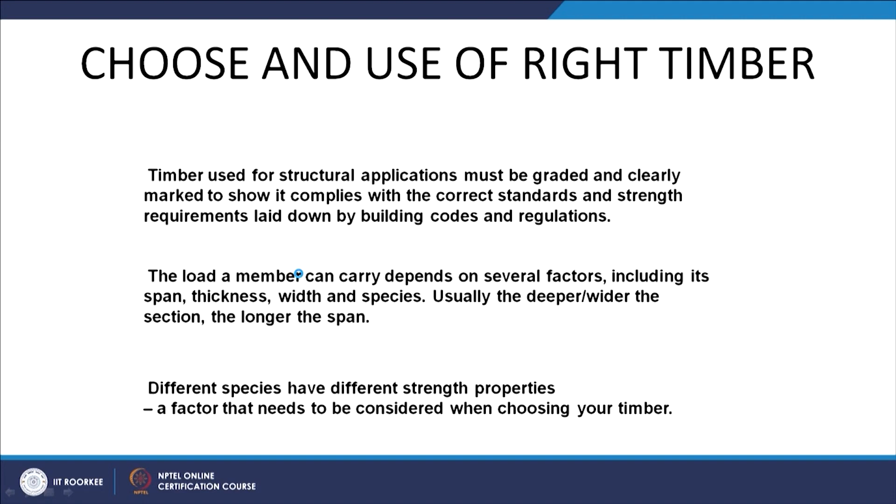The load a member can carry depends on several factors: the span of the floor, thickness, width, and the type of species. If it's oak or any other local species, the strength varies. Usually the deeper or wider the section, the longer the span. So different species have different strength properties, and one has to be very careful in choosing the timber.

For example, here's how timber is graded. You can see C16 here, which is C16 grade - this is called visual strength grading. Normally there's a trademark, a certification body, and it's a British standard reference, which is dry graded, then the company logo, and it has a strength class and species. It basically defines the strength, the size, the type, and the number of strength-reducing characteristics allowed in each grade.

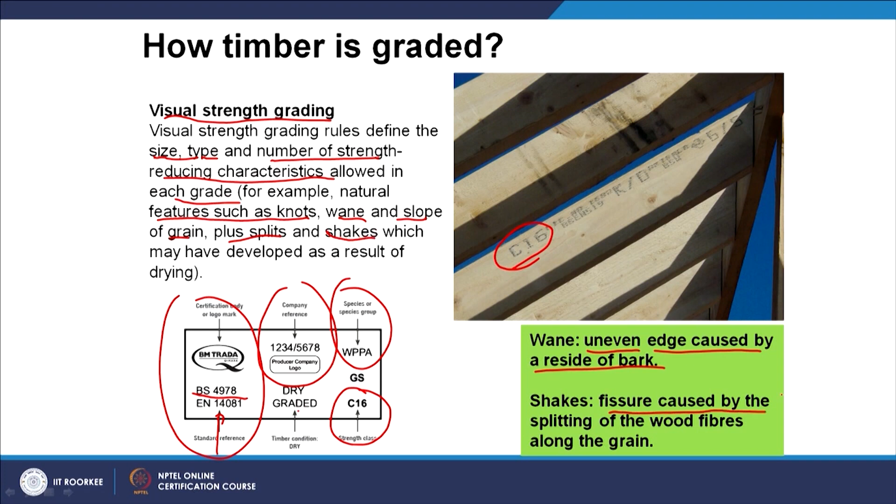For example, natural features such as knots, or wane - wane is nothing but an uneven edge caused by the residue of a bark. Then there's the slope of the grain, plus splits if there are any cracks, and shakes - shakes is a kind of fissure caused by the splitting of wood fibers along the grain. So this is grading by looking at a piece.

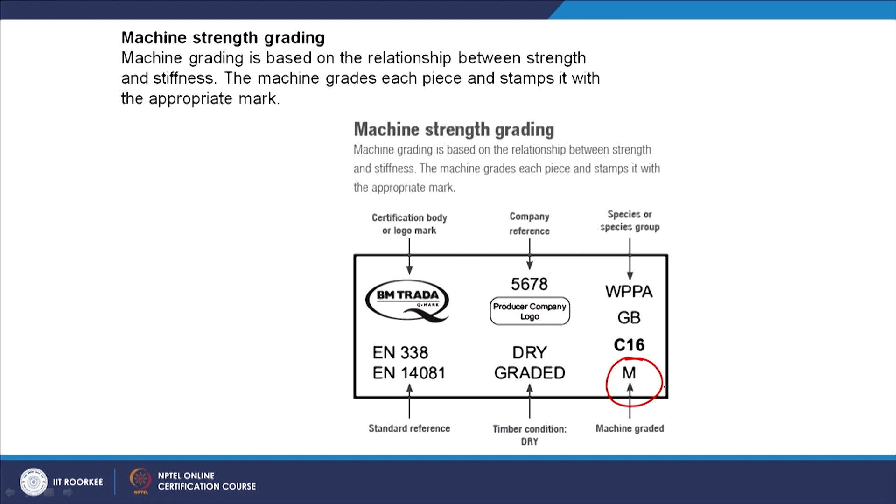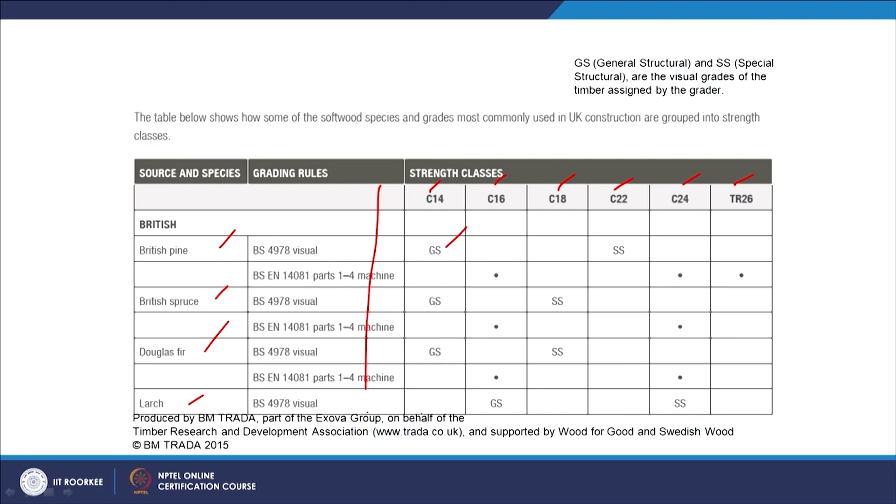The second one is machine strength grading - here you can see the M, which reflects the machine grade. I'll show you a brief classification: you have British pine, spruce, Douglas fir, and larch, each with their grading rules, and general structural classes C14, C16, C18, C22, C24, TR26. So there are certain strength classes, and also special structural ones. That is how it's classified.

So what we do is look at the following species and sizes: 38 by 97, 47 by 97, 47 by 220. For instance, if you are using 38 by 97, in C16 clear maximum span you can go for 1.76 meters, whereas in C24 you can go for 2.05 meters. So by changing the grade you can go for a bigger span.

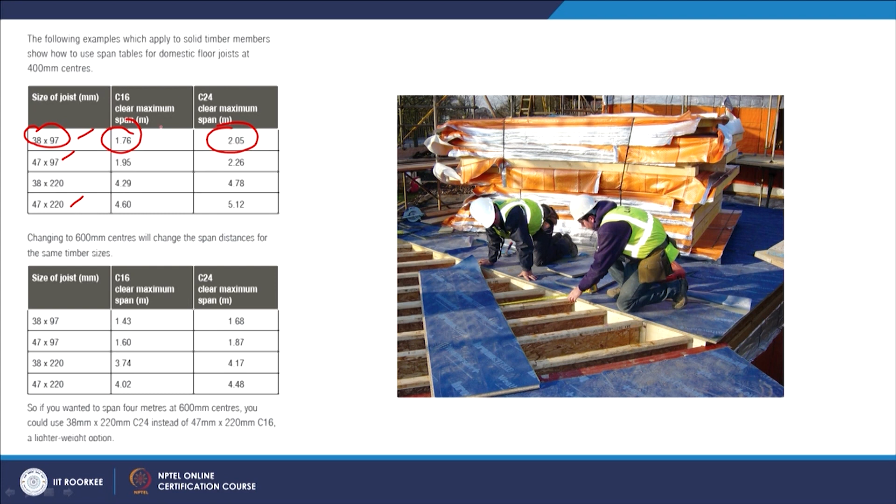So if you wanted to span 4 meters at 600 mm centers for a floor joist, you could use 38 by 220 C24 instead of 47 by 220. This means the depth of the timber changes if you are changing the grade of the timber.

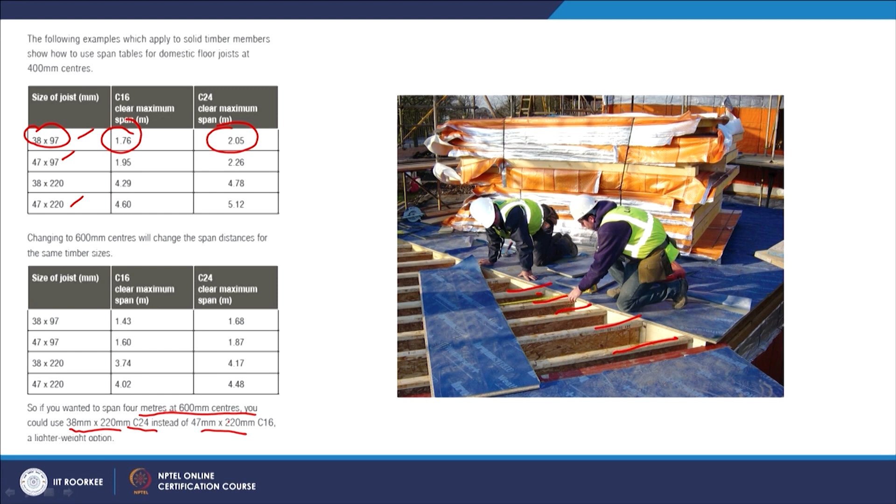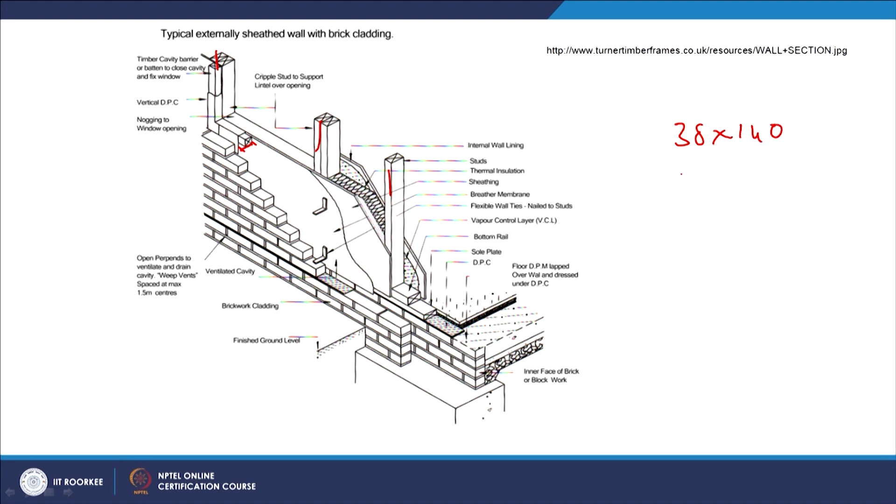This is how a typical wall section looks in most of the UK in recent times. You see the timber studs, the windowsill, and a 50 mm cavity. The timber panels are normally external. We usually follow about 38 by 140, that's the common width, whereas internal panels are 38 by 89. In the 140 panel you have 9mm OSB, Oriented Strand Board, and over that a Tyvek membrane, which is breathable, then about 50 mm cavity, and then the brick wall continues.

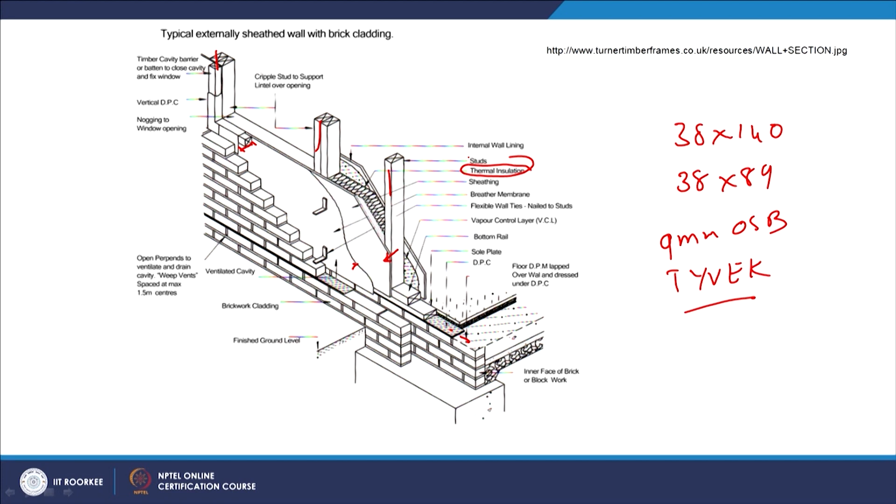And you have the DPC here, and in between these panels you have the insulation material as well, thermal insulation. This protects from the weather conditions, and this is the general makeup of the wall. I'll show you a small project how it's done somewhere in Oxford.

Generally when the architects give you the plan, you study the plan, sections and elevations. The first thing we do normally is draw all the sections and elevations.

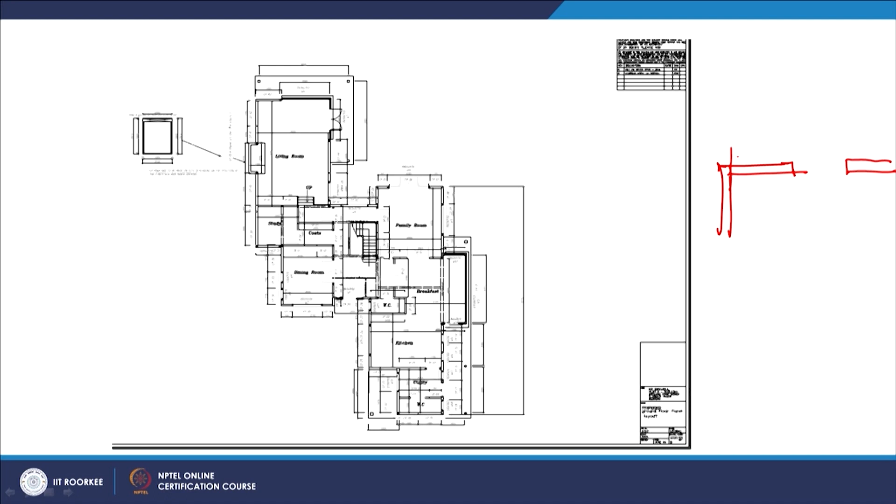Then what we do is break it down - let's say this is a wall and this is a window. We take from one edge and mark it into EP1, EP2, EP3. That works because we need to give a little buffer space for placing the lintel load, with 2 studs or 3 studs.

At the same time, for the corner stud, one panel sits here and another panel sits here, with another corner stud so that we can nail it. This is how the panels are done in a clockwise process - 1, 2, 3, 4, 5, 6.

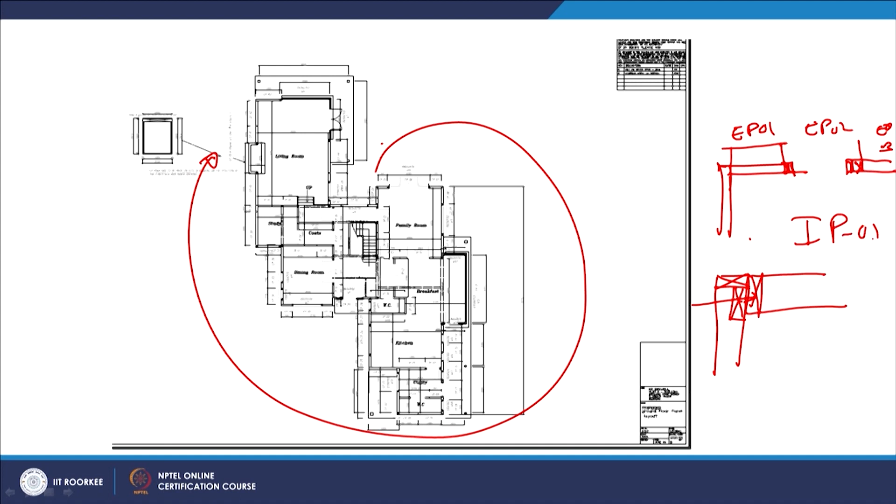At the same time, the internal panels are normally represented by IP01, IP02, and so on. Similarly, we do the first floor.

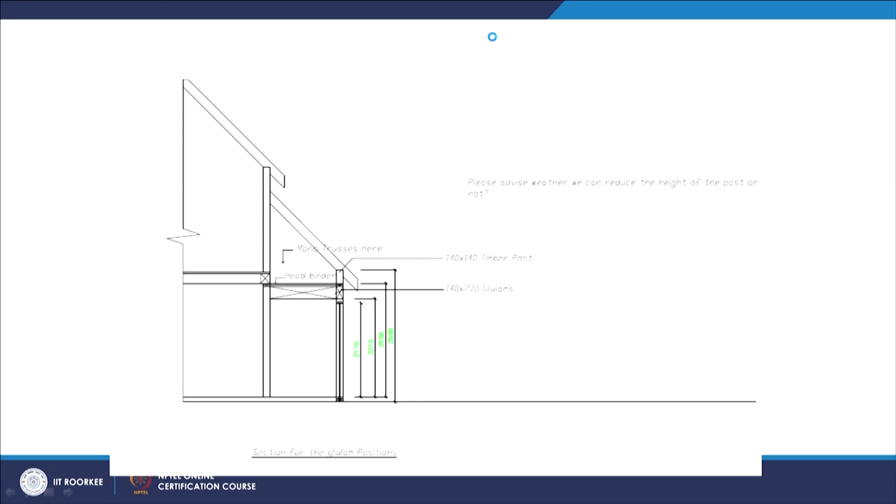When we draw the sections, the structural engineer has already mentioned where to keep the beams. So when we know these are the places we need to give beams or steel sections, one has to really carefully draft with the spacing aspect of the joist, as well as account for any other structural considerations to support those elements.

For example, here he mentioned about 140 by 270 glulams. So we need to create a beam on the other side and provide for it. This particular roof is basically a cut roof.

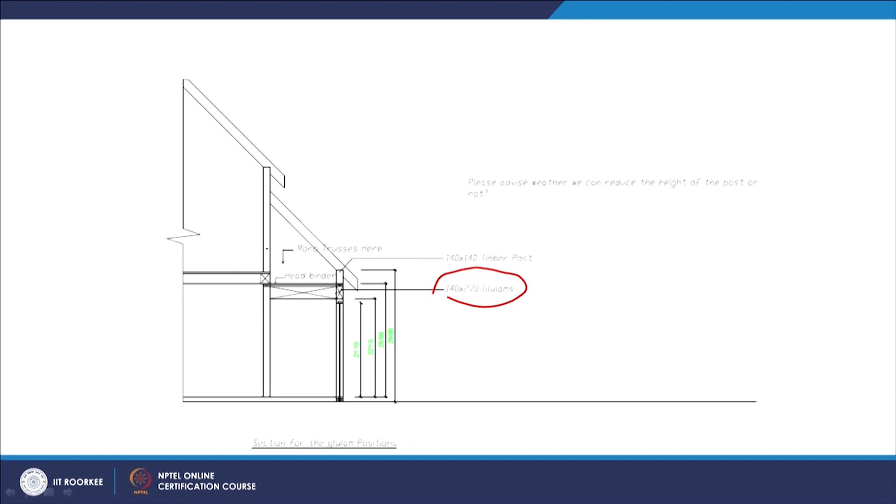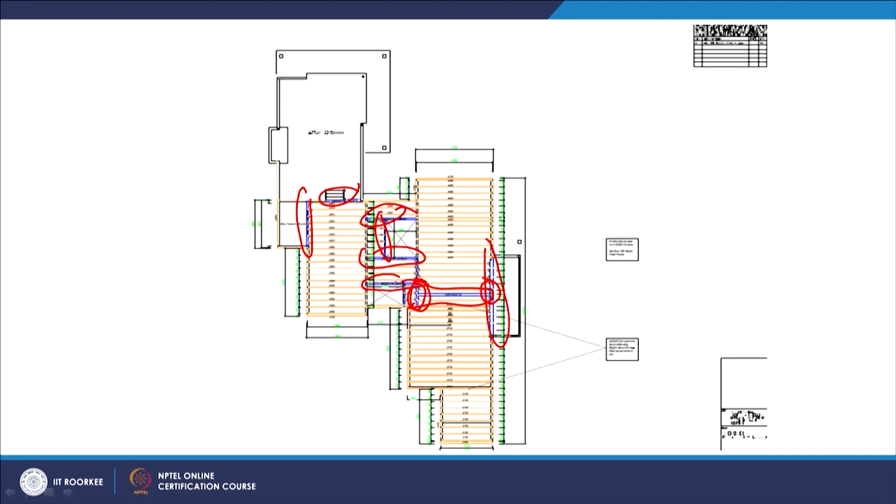So the moment you are keeping this, at these places you have to give structural provision with some more studs under it. This is another project in Rutland, a restoration project, with beam and block foundations.

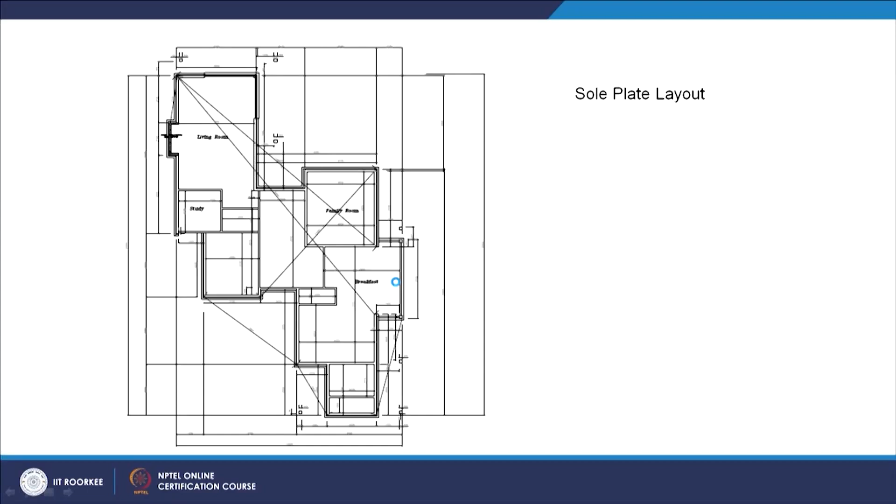After doing the layout of the manufacturing process, it goes to the erection team, where we get the sole plate layout. We measure diagonally to make sure the sole plate layout is correct.

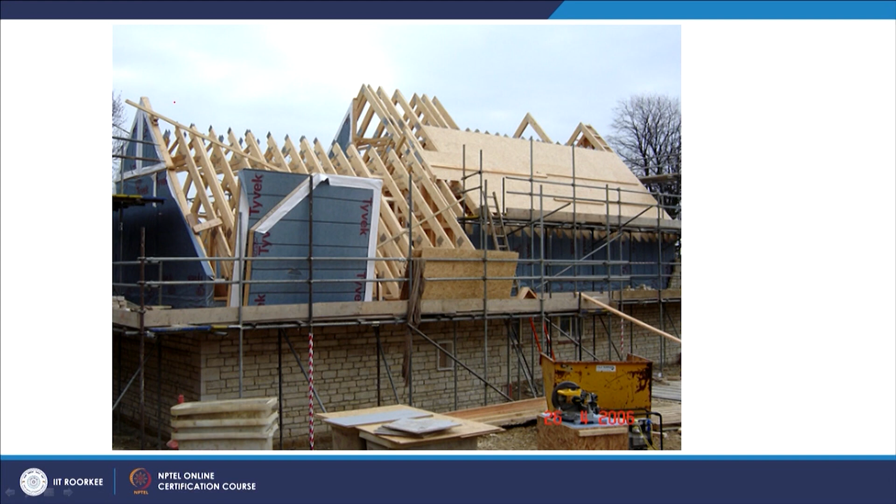Then the panels are erected. You can see this is stone because it's a restoration project, so the context of the stone facade is needed. Instead of brick we used stone, and you can see the attic truss - the whole truss is manufactured and sent to the site, and they are erected. This is how the panels look like.

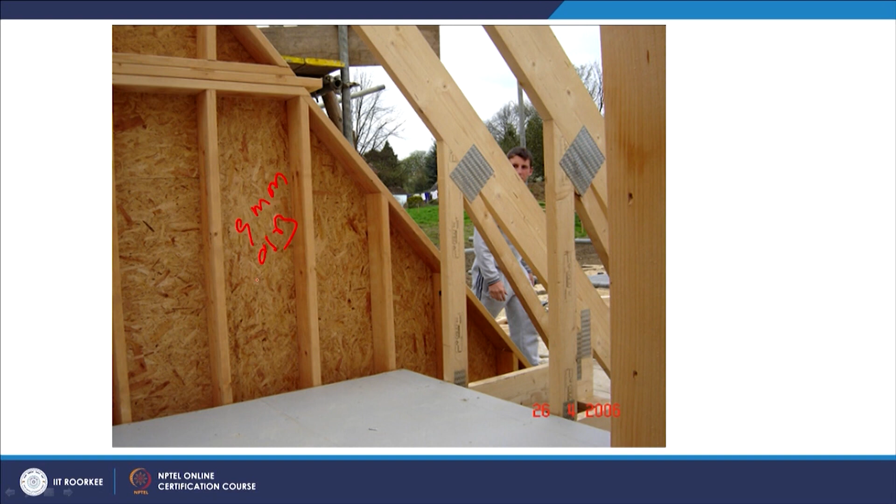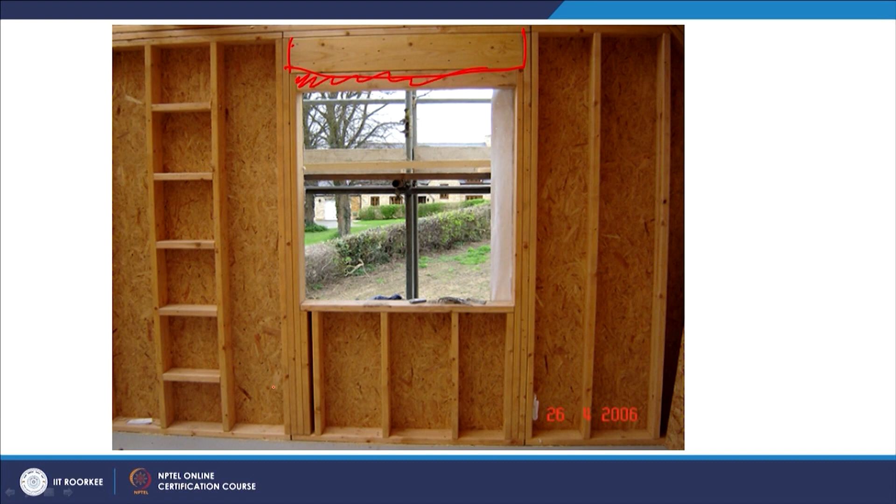And the 9mm OSB, oriented strand board, and you have the nail plates, and this is the panel, this is the head binder, and then again on the top of the panel. So this is how a window is made, and this is the lintels which are resting here, and any packer material we fill it in. Whenever there is a load coming up, the engineer suggests having these as per the span tables.

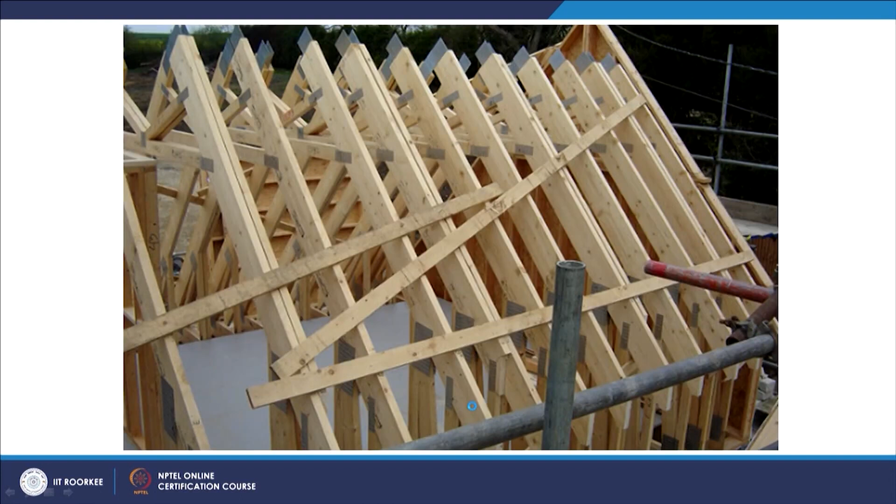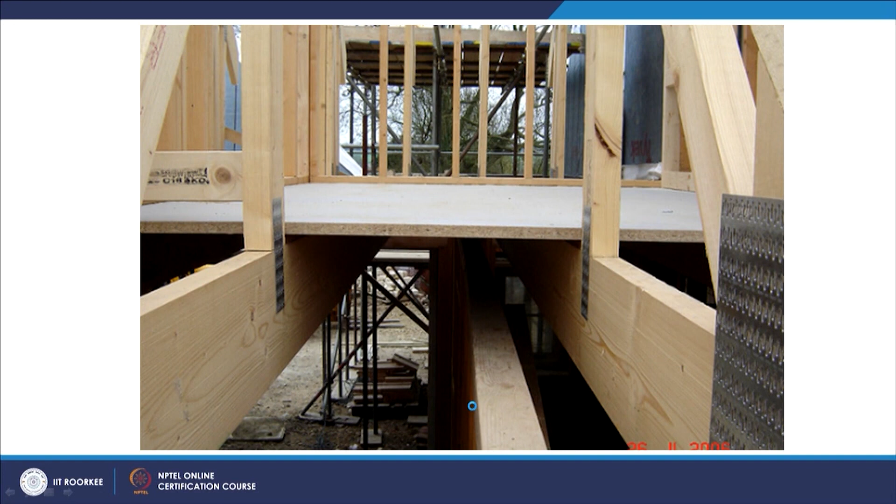And then they also show how they erect the roof, following the safety aspects as well, going step by step and putting some kind of temporary supports. This is called bird's mouth, and this is how a wooden deck, 22mm wooden deck, is placed. So this is a brief introduction to how timber frame construction is made. It's a prefab kind of thing, everything manufactured in the factory and sent to the site.

They are erected in 1, 2, 3 weeks time, and that's it, the end of the project. Then the brickwork comes on. So it's a very quick process, but the only thing is we have to take care of each and every minute detail. Even a 2mm mistake causes bigger cost and time on the site.

Now the challenge is, can design become a challenge for ensuring sustainability? Can we reduce waste by design? As I said, the moment we make any mistake in our drawing, it becomes more waste on the site, more cost, and more travel time. So obviously this is one important aspect.

So can we plan with time and money? And can we deliver aptly on time, especially in cold countries because of the weather conditions? How can this particular system be worked out in such a way that the whole project management is carried out so that we can deliver on time?

So this was my learning, and as I said, by doing these projects I realized why these kinds of advanced technologies are not taken to the Indian context, to Uttarakhand. That is where I still haven't found an answer so far, but I would still give you my journey on how right now we are working in Uttarakhand, especially in the hilly areas, along with one of my PhD students who is also working on disaster affected areas, especially looking at indigenous knowledge.

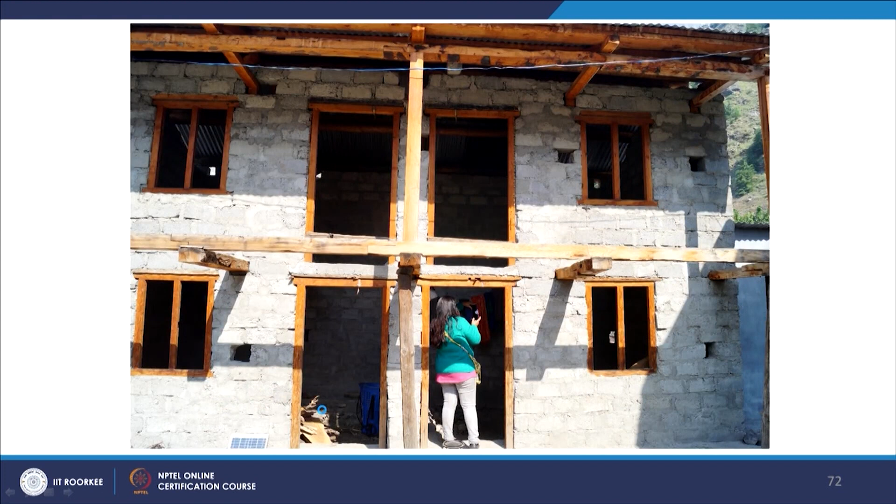So you can see how the modern developments are happening in a similar way.

This is one classic example. You can find many of these houses here and there, gradually getting abandoned because some families have migrated down, and who owns them and what to do with them, no one knows.

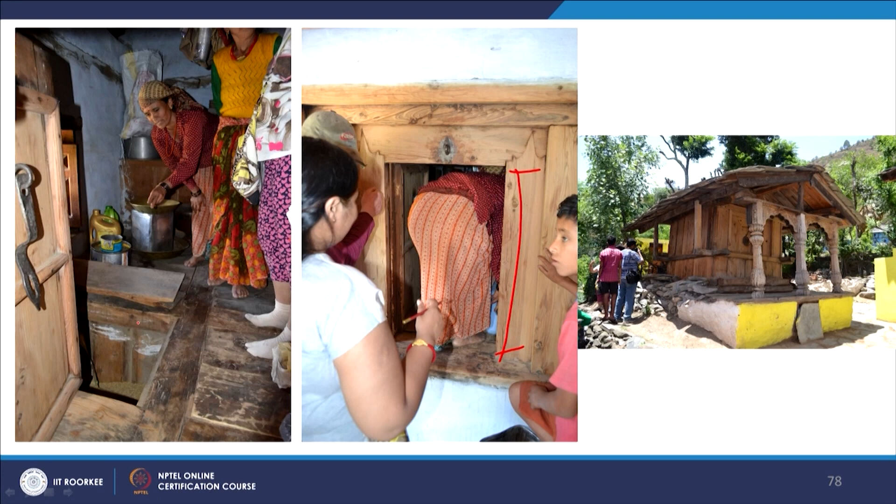Now, after the earthquake and the floods, there are a lot of recent modifications happening in this region. Especially new buildings are coming and old buildings are abandoned. So on one side they are abandoning these old buildings, but during winter I have seen people using the same buildings because it makes them warm.

Similarly here, sometimes the old people are still using these places, while the younger generation started using the new ones because of certain modernity and modern impressions they are thinking of. But ideally for climatic reasons, the old structure is much more sensitive to the climate, though the new one is more advanced. So we have seen an adaptation - one is an abandoned version, one is a seasonal version, and the third is side by side, a double house concept, where you use both, irrelevant of how they originally lived.

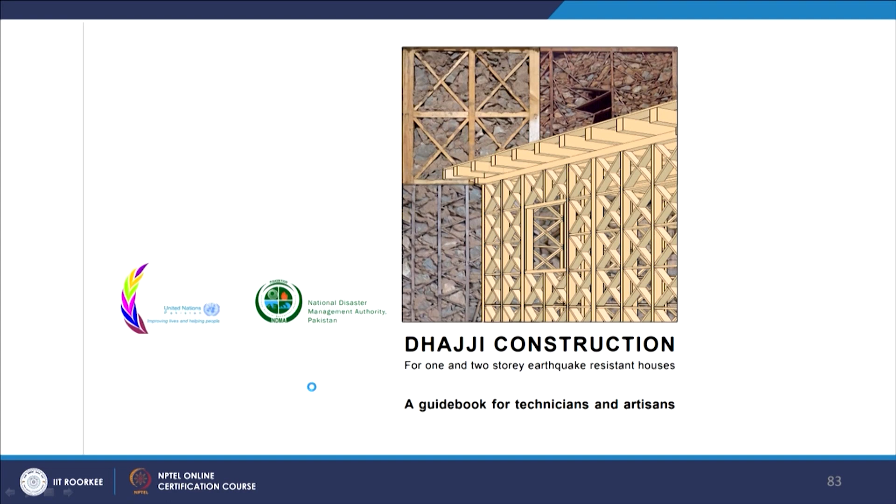In the same process, I can show some good examples, especially of Dhajji constructions, where the Pakistan government is working on a guidebook for technicians and artisans on how to do Dhajji construction, what technicalities are involved, how we can qualify these traditional technologies into the code process, and how we can make them eligible. That is one way we can bring these traditions back into modern times in the present context. Thank you very much.